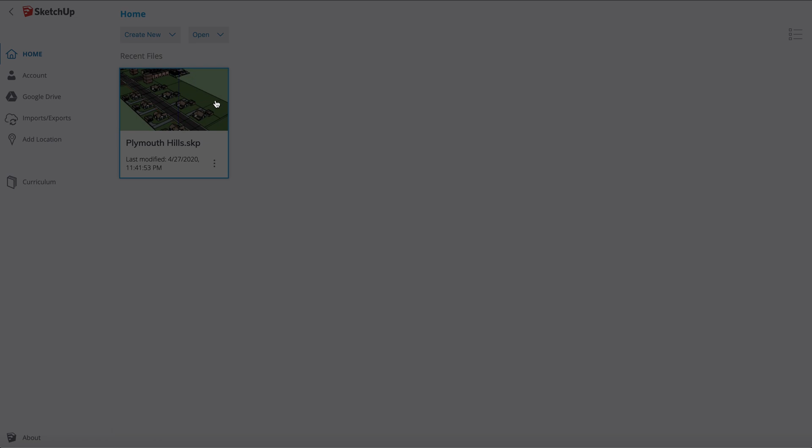SketchUp's opening. I don't want to open it on a file, so go to Create New, then Simple Template Feet and Inches. If for some reason you're not seeing that, you can open up an old file, like this one from my 7th grade class. Then go up to the folder icon and hit New, and it'll give you a new workspace.

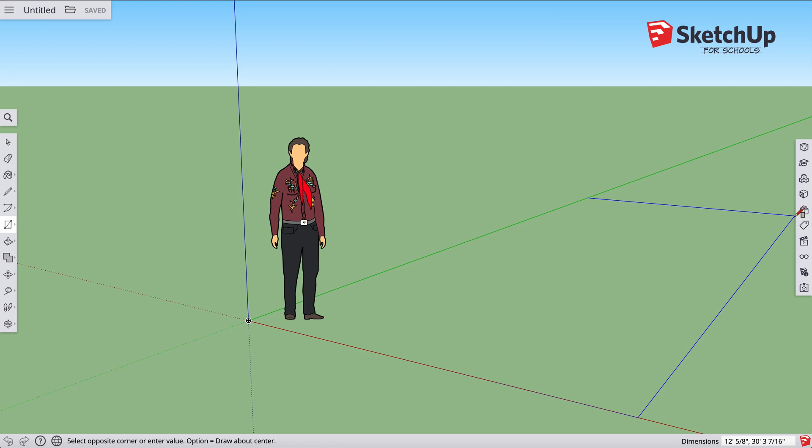So I'm going to build a room. Start a rectangle at the origin, click and drag it out. Remember the dimensions are in the lower right corner. This is going to be about 12 feet by 30 feet. It's a really big room, but it's your ultimate room.

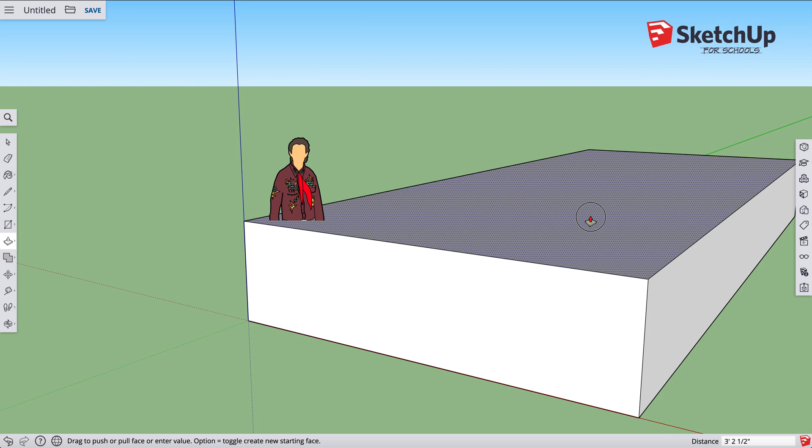So there you go. Then we're going to make this 3D, so go to the push-pull tool and pull that up. Now the problem is we can't see into the room.

So what I'm going to do is go to the Select tool, select this wall, right-click and go to Hide. The wall is technically still there, but it's hidden so we can see through it. Do the same thing over here: click on that wall, right-click and click Hide.

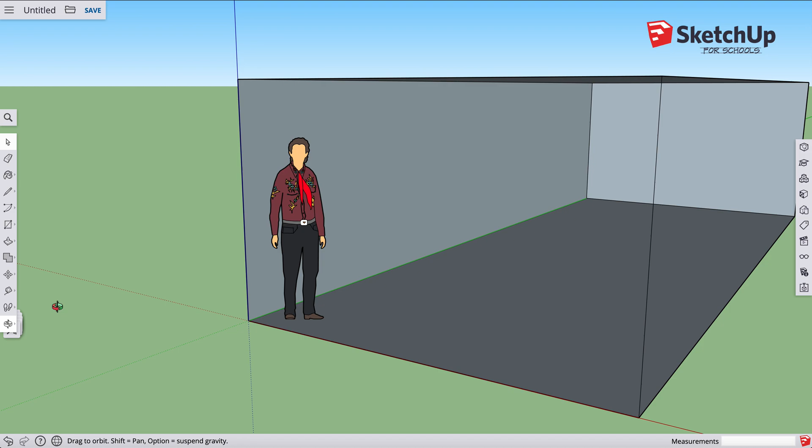Not that one, I'm going to move my view here a little bit, zoom out - oops, wrong way, there we go, my zoom is really touchy on this mouse. I'm going to select the ceiling here too, and again right-click and hide. I would recommend leaving the floor there so you can get some scale for the size of everything in the room, so your bed isn't enormous or super small or whatever.

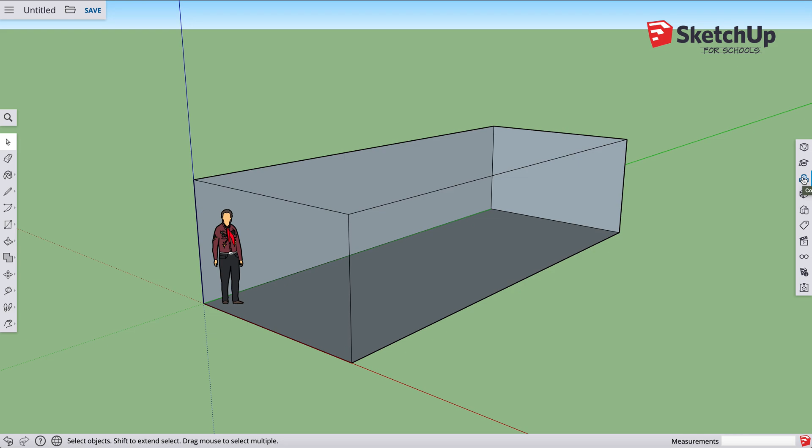So now the 3D Warehouse is one of the tools over on the right-hand side, right above the materials - it's those three boxes there. It says components, but you click on it and it gives you access to the 3D Warehouse.

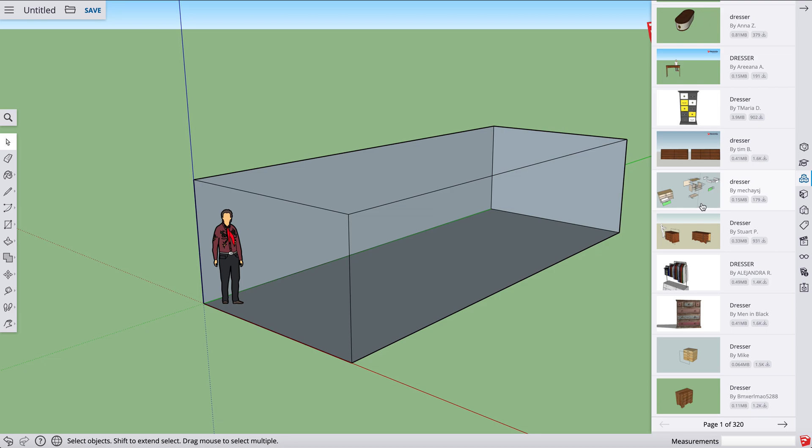So in this field here, I'm going to type dresser because I want a dresser in my room to put my clothes in. So these are all different dressers. I would recommend finding one that isn't too big a file - like 3.9 megabytes, that's pretty big, you don't need that fancy of a dresser. And there are multiple pages - there's 320 different dressers.

That one looks kind of cool, it's only 0.47 megabytes. So I click on it, move my cursor over, and there is my dresser. Now I'm going to move the corner on that edge. Maybe I'll put it over here.

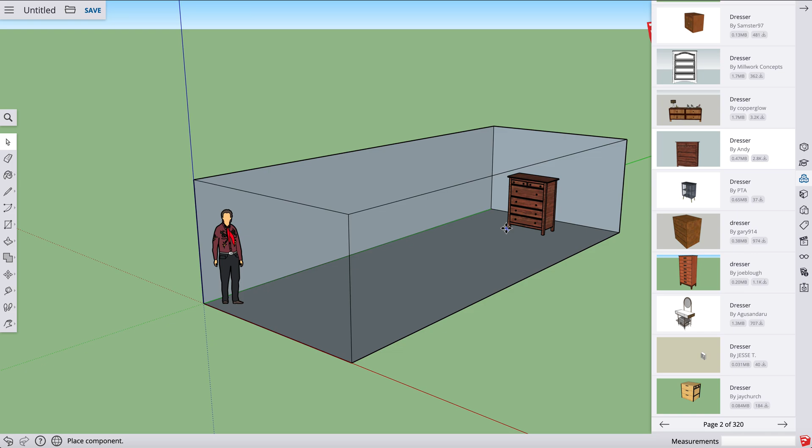Actually, I want to show you how to rotate real quick. So there it is, and if you notice, it automatically went to the move tool. When you're on the move tool, on a plane of the object, on a surface, and you hover over any of these little red plus signs, it brings up this compass looking thing. That's rotate. Green will rotate it that way.

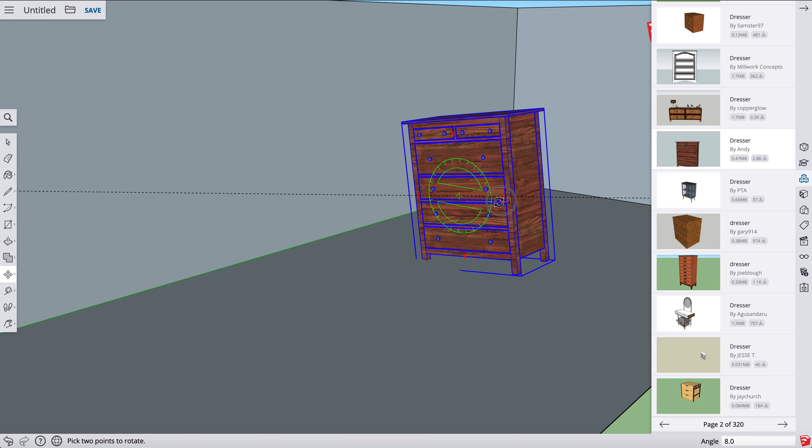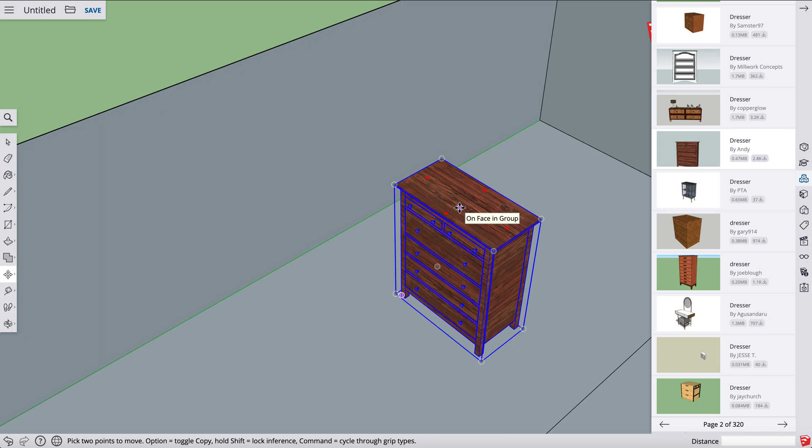If I go over on this surface and hover over the plus sign, it gives me red, and that'll rotate it this way. I want to get from the top view here, because I want to rotate it and put it on this wall over here. So again, move tool, the 4 arrows. I go to the top surface, hover over one of those red plus signs, click and drag, and now I can rotate that over.

Now what I'm going to do is grab the corner of the actual thing, and click and drag it over here and put it on the edge of there.

Now, if the dresser's too big or too small, you can also change the scale of it. It's also under the move tool here, this one. It's on face, but you click, and why isn't it? Oh wait, let me do this.

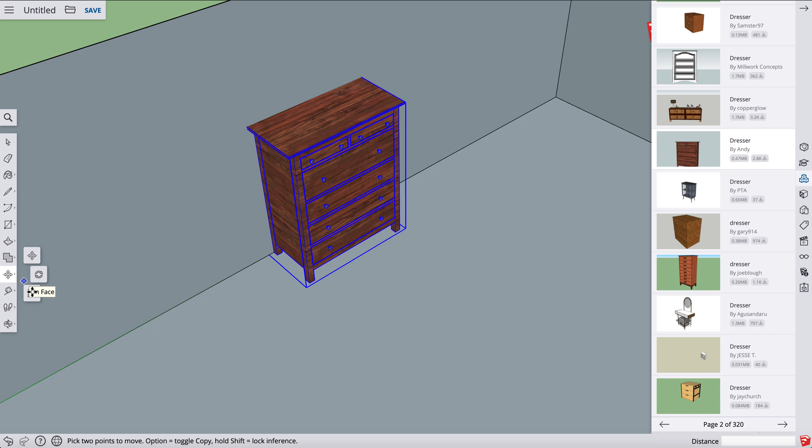I'm going to select off the screen. Okay, I click the move tool. Oops, sorry.

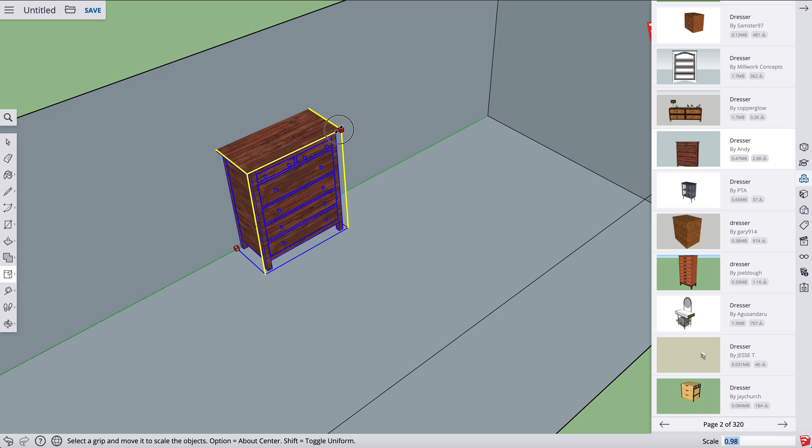Click the dresser to highlight it. Go here, click the scale tool, and it brings up all these little dots. Now I'm going to grab one of these corners. If you grab a corner, it'll keep it in the right proportions, it won't stretch it just vertically or just horizontally. So I can change the size of this.

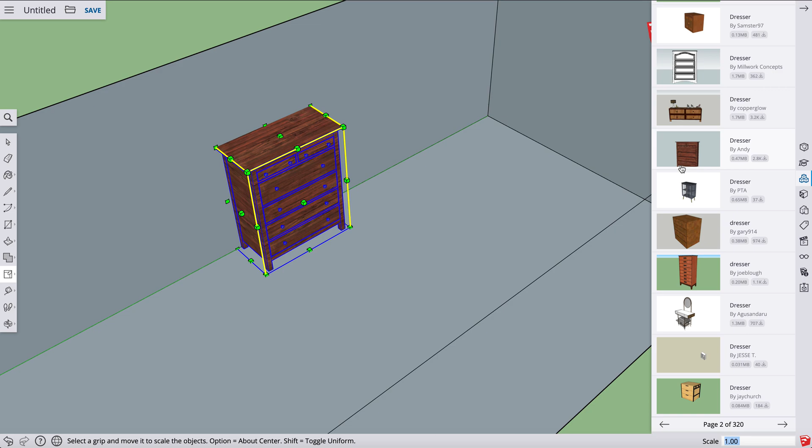The reason that's important is because sometimes these files that you find in the 3D warehouse are enormous, and the bed could be 5 times bigger than the dresser you want for your room. So you might need to scale things. So that is scaling, I think that is about it.

Play around with that, you can make some really cool looking things. Again, if you want to color things, if you want to paint the walls, go to materials, which is the single block over here.

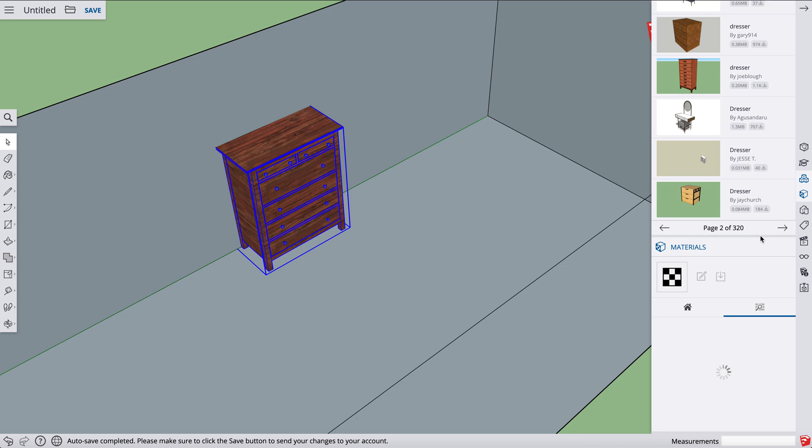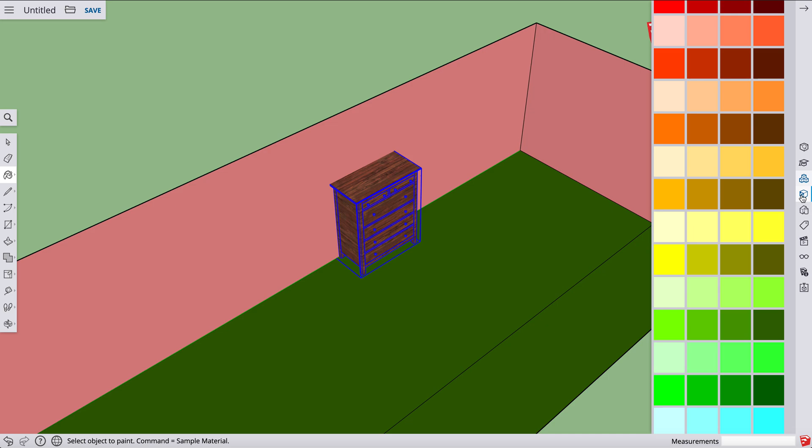And all your colors, I'm going to have a pink wall over here, and maybe all my walls are going to be pink. And I'm going to do something crazy here, green carpet. You can actually probably find carpet. Yeah, carpet right here, there's all sorts of different carpets. Let's do that, really weird. Whoa, that's crazy. So I don't think I could live in this room, but it's interesting looking.

So play around with this, have some fun, import some cool stuff, try and make a design of your ultimate room. Please let me know if you have any questions.

And if SketchUp is being glitchy, you might just have to do a cardboard model or something like that, but try SketchUp first. It is kind of fun to do all these cool looking things, and it's going to turn out to be really professional looking, more so than a cardboard model.